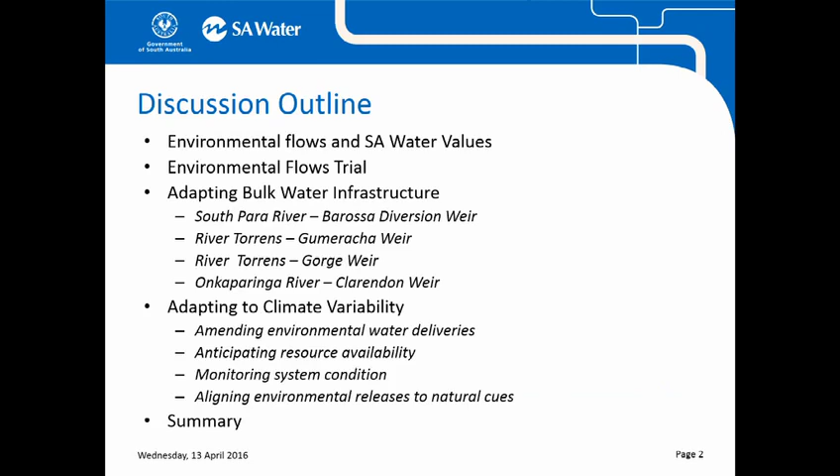I guess one of the motivations for doing this talk today was, well, I'm not going to be talking about pure science here, but talking about some of the things that SA Water do to enable the science to occur. And a lot of this work stems from the fact that we are a licensee under the Mount Lofty Ranges Water Allocation Plan, for which we pay the NRM board $1.2 million for the pleasure. So we also want to make sure that any drop of water that we're giving away for the environmental flows and utilising for the benefit of the environment is being used in the best possible way.

There's also the issue that in supplying the water, we don't actually get enough water from the Mount Lofty Ranges by itself, so it's all of our systems working together to supply Adelaide. So whatever volume of water we take from the Mount Lofty Ranges and release for the environment, we're essentially pumping that water from the River Murray. And then we've also got the Adelaide Desal plant as part of our system.

SA Water's values that guide our strategic thinking are presented here. The primary factor that we're taking into account here, where eFlow fits, is about the healthy environment. We want to show that we're a good steward to the environment, but we also need to make sure that all of our values are being taken into account. So that's where the value for money comes in, making sure that we've got a smart investment while maintaining an affordable water supply system for South Australia.

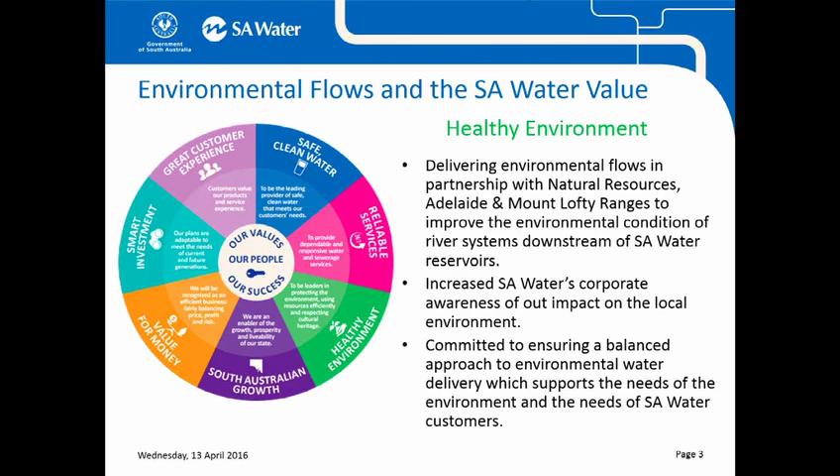I think the other question that comes up regularly is, are we a government organisation or are we a private company? And the answer is we are very much a government organisation. We have multiple tiers of regulators that we report through, but we also ultimately report to our minister and the general public.

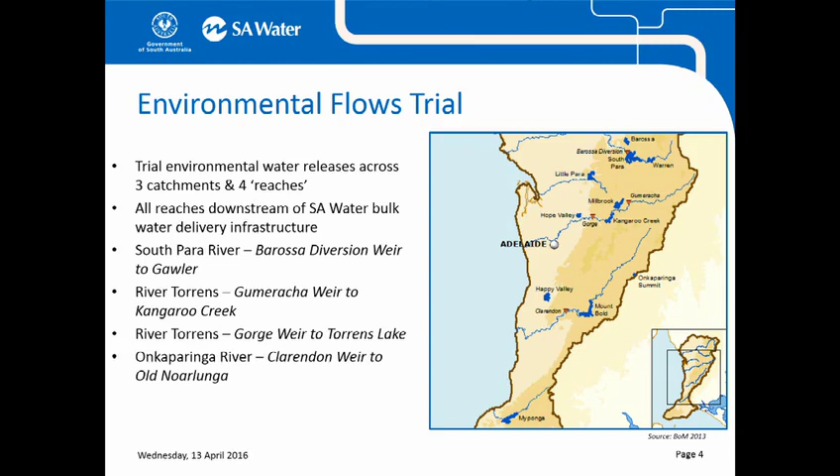So Steve's presented the lineup of our major reaches, so I'll use this opportunity to skip over that part. So our licence in the Mount Lofty Ranges is to extract up to 143 gigalitres per annum. Part of that licence currently is around making sure that we supply at least 16.5 gigalitres per annum, of which we capture some flowing down from Gumeracha Weir to Kangaroo Creek.

This year's been exceptionally dry, and we've actually only had about 33 gigs of water come into the Mount Lofty Ranges reservoirs at the moment. And if we're looking at just the reaches that are relevant to the eFlow trial, that's about 27 gigs flowing in through those reach catchments. So we're very, very focused on how we adapt to that, but I'll talk about how we go through amending some of the flows with the NRM board in a second.

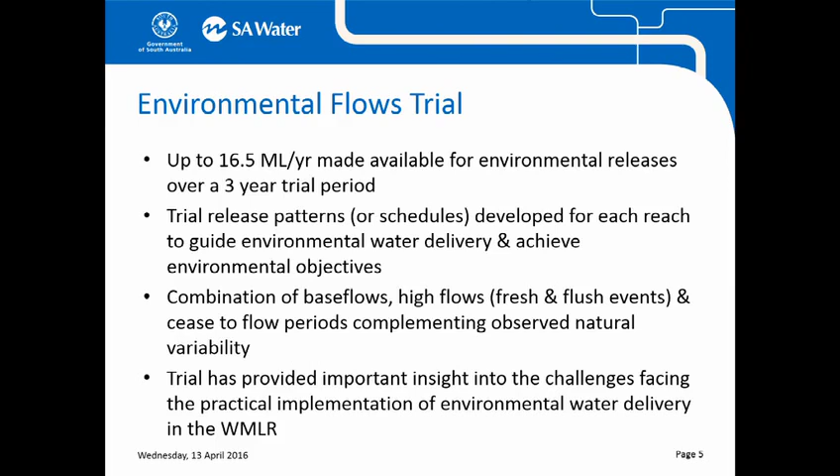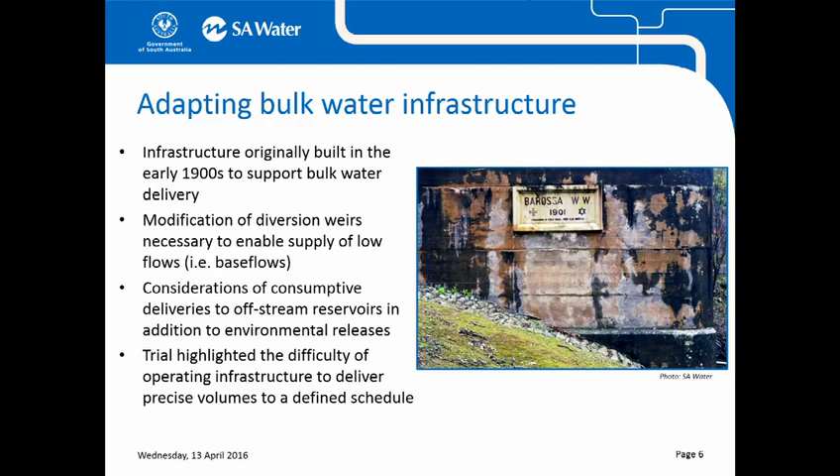One of the challenges that my predecessors had to deal with was the fact that a lot of our infrastructure was built as early as 1860 and as late as somewhere in the 1920s. This is the Barossa Weir that diverts from South Para Reservoir through to the Barossa Reservoir. And I'll show you another slide in a minute, but a lot of this infrastructure was purely designed for shifting huge amounts of water around the place, and I'm pretty sure that eFlows probably weren't a consideration when these were installed. That's necessitated significant modifications that take into account the heritage values.

Just another view of the Barossa diversion weir that you just saw. I guess I get excited by these because there's lots of craftsmanship in the building of these reservoirs. And they're just about all located in absolutely stunning locations of our catchments, even though they are heavily modified. So you can see partly down there, we've had to put the pipe there to manage the low flow bypass. I just forget the volume. Yeah, it's 7.3 megalitres a day. We can do that, but it gives us some control.

One of the tricky parts of the South Para system is that we've got a giant tower that sits in the reservoir that controls the levels that we can release from. That had to have a lot of modification to avoid water hammer happening in there. But to enable the big flushing events to occur in the South Para, we have to make sure that there's sufficient water in the Barossa reservoir so that customers don't have their water supplies cut out while we're doing the flush, because we don't have the capacity to do both, supply the flushing events and keep the water supply up to the Barossa reservoir and the treatment plants. A lot of the water treatment plants rely on a certain narrow range of head difference in the reservoir.

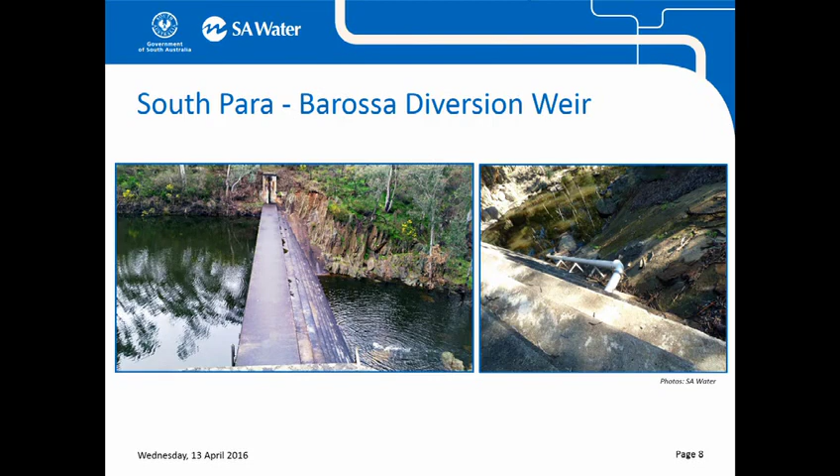I think the other thing I forgot to mention earlier is quite often we'll see with the climate patterns that we're really dry up in the northern ends of our systems, and as you get further down you're getting a little bit better. So South Para's almost a basket case, to be honest, with some of the flows we're getting at the moment, but Torrens River's slightly better, and then Onkaparinga is much better again.

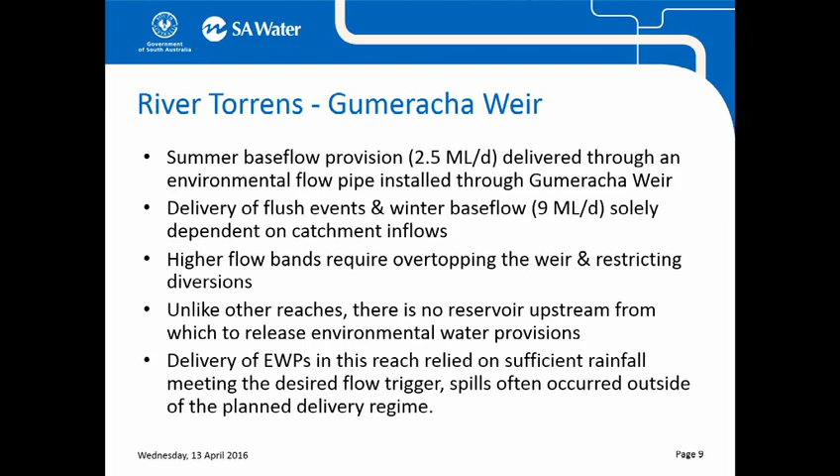So this site was also impacted by the Sampson Flat bushfires as well. So we've missed out on a period of data releasing through here. But most of the time, the water going through the low flow bypass, which is that pipe you see coming down, is left on all the time, and I think we're at a reduced rate at the moment, looking at around 1 meg a day there.

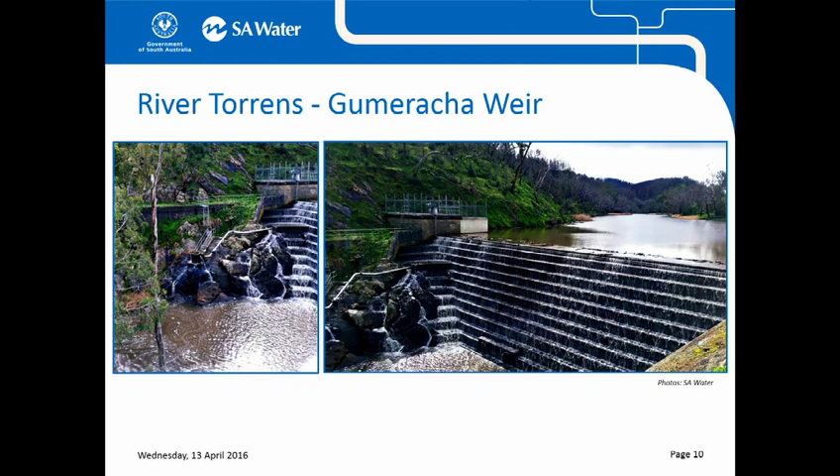And the big concrete structure with the fence around it, that's essentially the diversion structure through to Millbrook Reservoir. And at some parts of the season we have to close that off to allow the big flushing events to go through over the top of Gumeracha Weir, which flows into Kangaroo Creek Reservoir.

Gorge Weir, I'm pretty sure that was one of our oldest ones. I think that's an 1860 type weir structure. So the green shed off to the right there, that's the diversion weir that goes off to Hope Valley Reservoir. And off of the pipe that comes into Hope Valley Reservoir is this other low flow bypass that's just at a constant flow rate.

So we're actually doing some work on Kangaroo Creek Reservoir upstream, and so we're not actually diverting water through to Hope Valley at the moment, which will temporarily impact the ability to do some of those low flows.

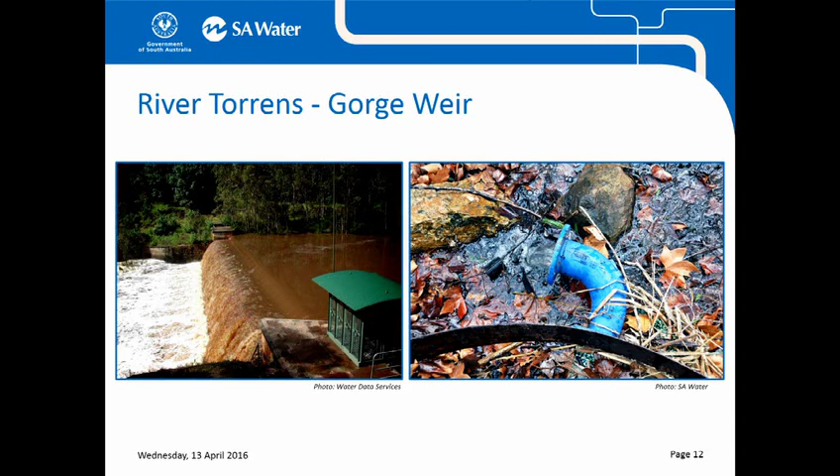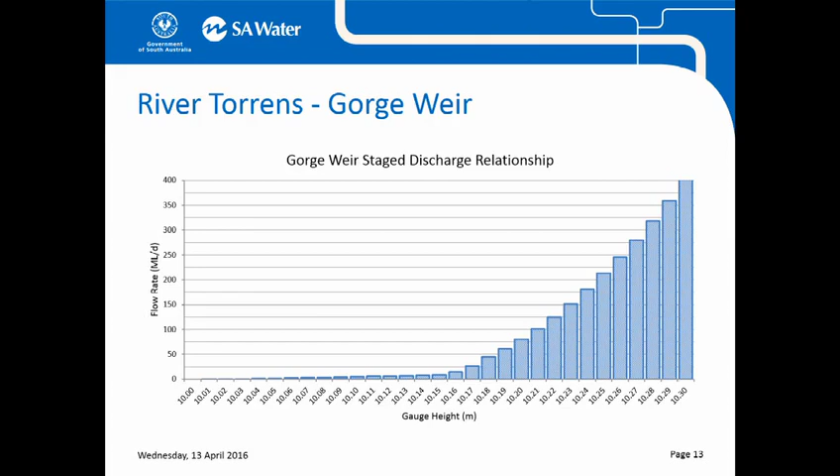Clarendon Weir, you've seen the pictures of. On the right, there's the low flow valve that we've had to install. Absolutely stunning site. The weir's all marble clad and completely amazing craftsmanship.

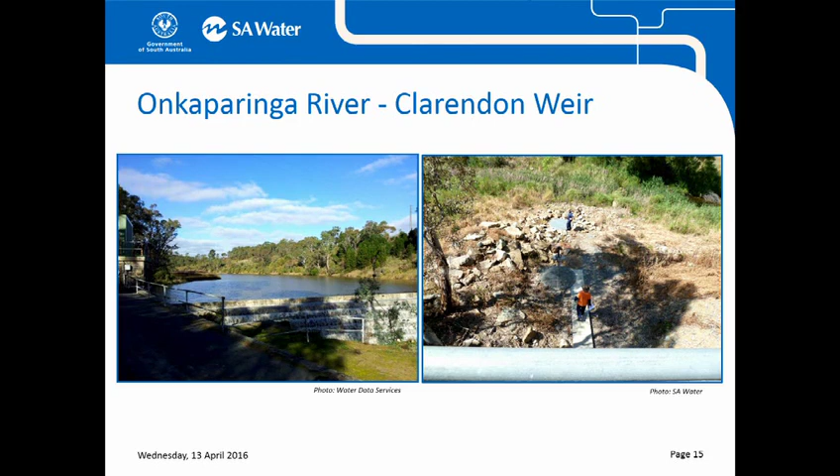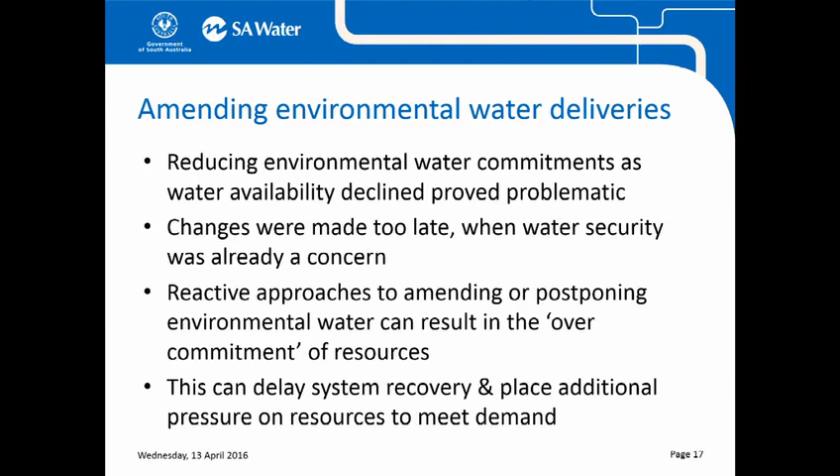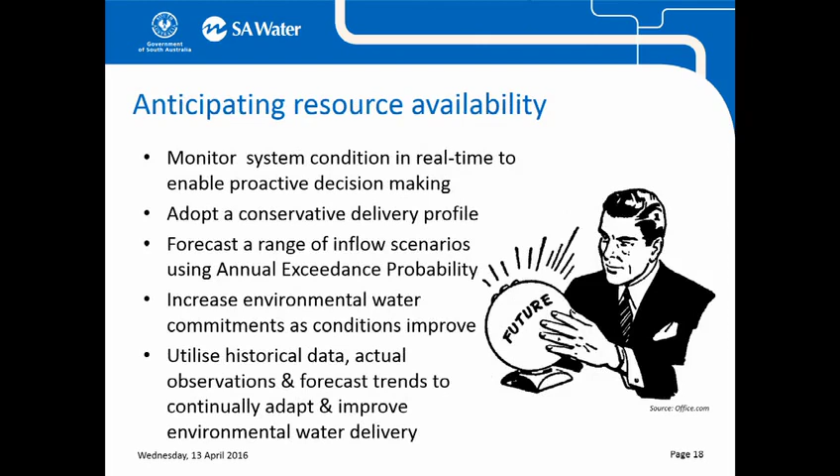One of the things that we're working through as part of the licence discussions is around the climate variability issues and how we adapt when there are dry conditions. We try to leave the flows going as long as possible, but we're also trying to work on tools that can enable us to preempt some of these flows and make sure there's a transparent decision-making framework that we can work with the NRM board on.

Skipping through a few of these because Kuma's giving me the hurry up there.

Part of Jess's role was to develop some of these tracking tools that we use to help provide that evidence, and that's been quite useful in guiding some of our discussions. You can see that Gumeracha's probably all right. You can see, I don't have a mouse, I don't think. You can see some of the cumulative inflows there, that this year is sitting on about the 90th percentile.

Incidentally, this line here is what we tell ESCOSA that we expect, and that's one of our key building blocks to building up the price. So that represents the 10-year average inflows. And you've got tracking the soil dryness index and things like that.

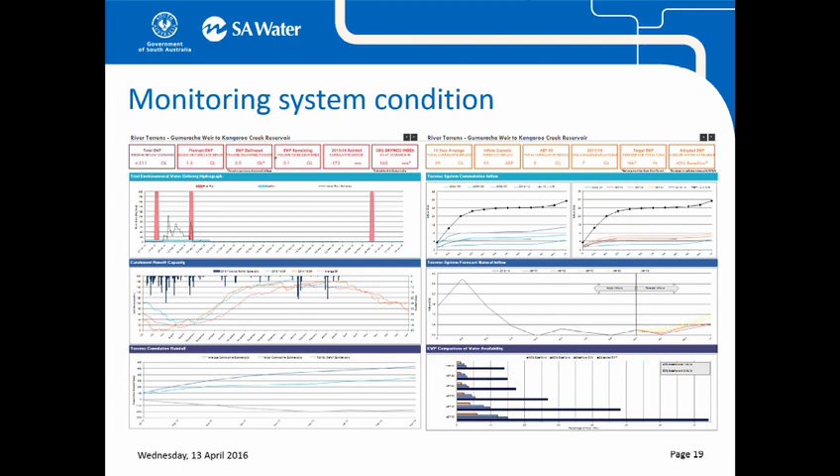One of the biggest challenges we've had in delivering these e-flows is making sure that our natural environment is being listened to, and I think the opening ceremony reminded us that that's an important consideration we need to keep in mind. On a lot of occasions, some of our flushing events were scheduled to occur when there's been absolutely no rainfall. So what's the point of triggering that? So luckily the NRM board's been very pragmatic with us on working through a lot of these issues.

It's also enabled us, one of the years Mount Bold was spilling, to take into account that event as one of the flushing flows.

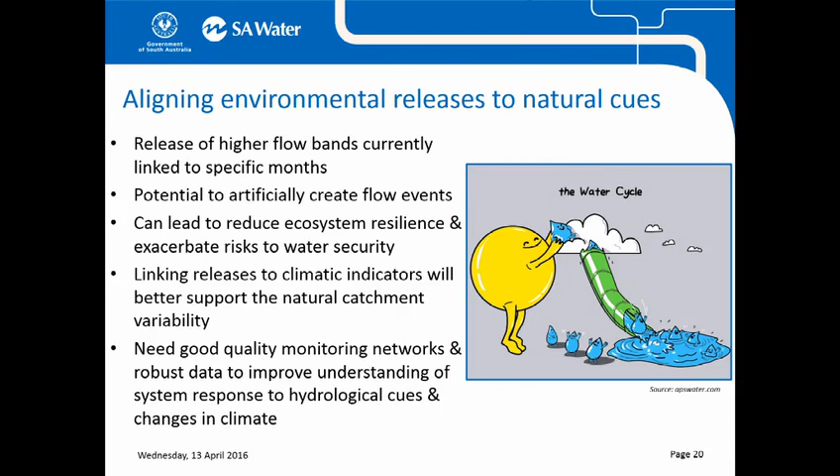Yeah. I think we've learnt a lot throughout this environmental flow trial, and there's obviously still a lot of work to go. I think there's plenty of questions still to answer, and we've seen from Ashley and Doug some really exciting work that's happening that may help guide some more clever ways of delivering what precious water we do have. Thank you.